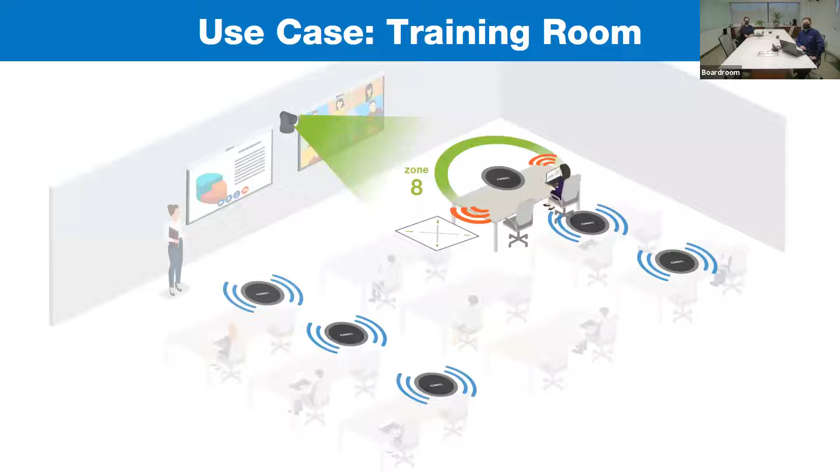Here's a COVID friendly training room, for example, and we've got a few preset zones for our instructor. So when she steps into these zones, the camera automatically hits that preset zone. Conversely, when there's a question in the audience, you have the opportunity to create zones for each of those tables as well, so the camera is hitting the table.

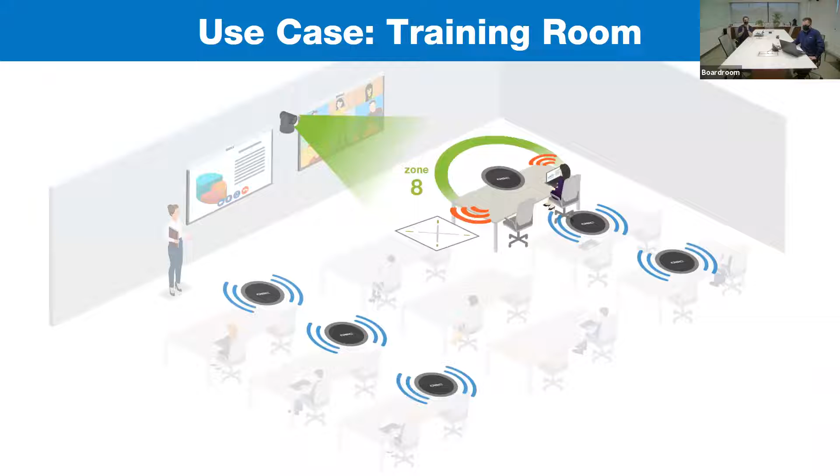Now, the camera may not be tracking in on somebody's face, and in a training room you don't want that. You basically want the camera to cover the entirety of that table. So you don't want a tight preset; you want to make sure you're covering the general area you're working towards.

Here's a closer look at what that training room might look like. Again, you've got loudspeakers overhead. In a room of this size, we would recommend two Sennheiser microphones positioned relatively in the center of the room so that it can hit the presenter as well as the audience. And then you've got the rest of the QSC ecosystem to support that effort.

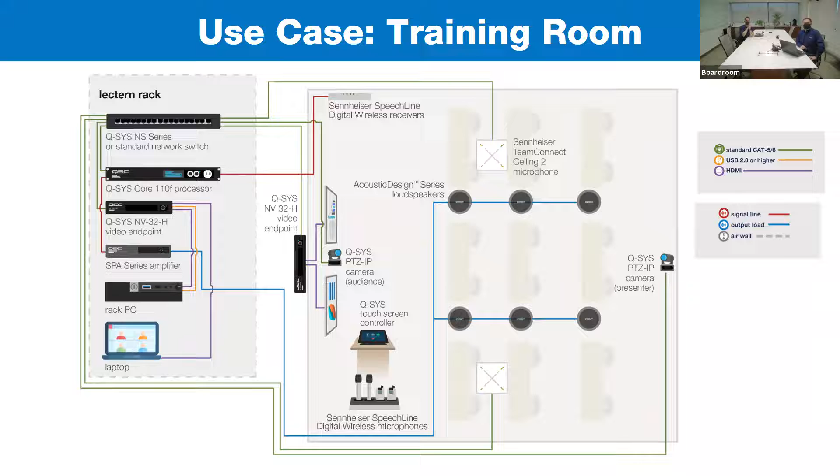We're not zooming in tight on faces. Rather, we are getting close to the zone, so that we have a comfortable margin of error, so that if I move from one side to the other, the camera is still picking up everything.

Let's see, anybody monitoring that Q&A? I see Q&A popping in there. Is there anything of interest before we transition? I promised that I would check.

Hank is asking about the camera chip size. The camera chips, like the color sensor size, right? Is that the nature of the question? It's on our website. As the Sennheiser group goes through their portion, I'm going to look that up for you guys. So no problem.

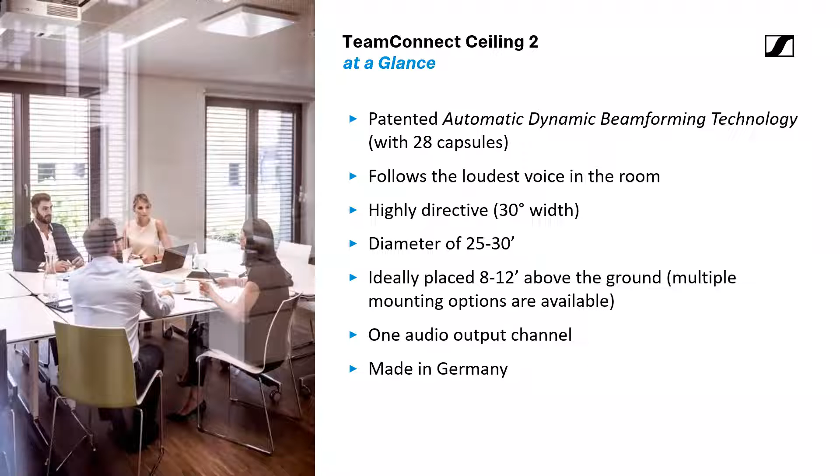Now, it is a single beam that is dynamic and beamforming. That means there's one audio output. And like a lot of our products, we make this in Germany as well.

That's it coming out of it. The secondary could be used as a switch hop if you want to go to another microphone or another Dante device in the ceiling. Or if you were doing redundant networks, you could use a primary and secondary for redundancy. It's got the analog out if you choose to use that - just a balanced 3-pin Phoenix connector right there. The other network port on the right is for control and PoE.

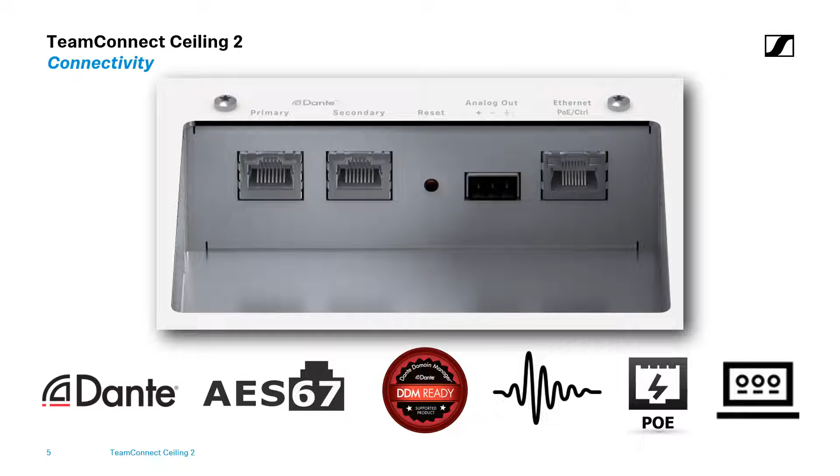Chris will kind of dig into the control platform a little bit. So if you're running a Dante network, 2 category cables to it and you're set and ready to go. If you just want to use the analog output, 1 category cable for power and control, and then a 2-conductor shielded cable for the analog output side. And it's a Broadway chip, so of course it's compatible with DDM and AES67 as well.

So just a quick little picture of what the coverage looks like. If we're looking at that 13, 14 feet radius, we've got really good coverage, and then just a slight drop off after that. This picture shows what it looks like at about a 10-foot height - that'll change a little bit if it's lower or higher. But if we stay within this 25 to 30 foot diameter rule of thumb, we're in really good shape.

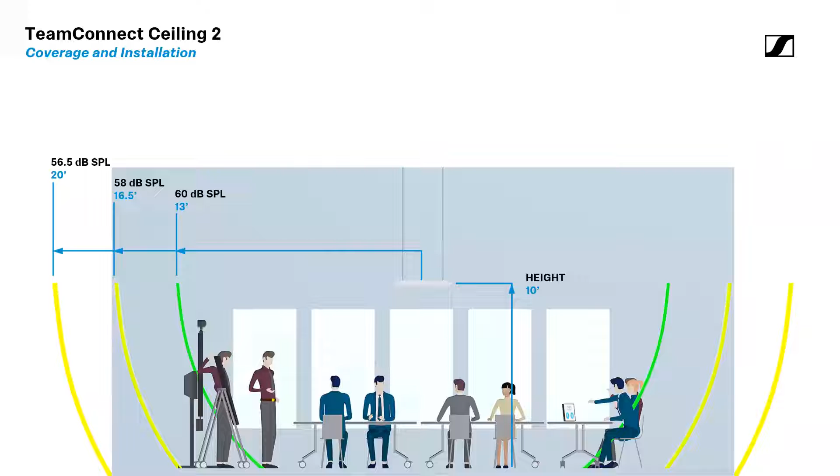So when we look at the automatic dynamic beamforming technology, we are not using multiple lobes or zones of pickup coverage. We are using that one tight angle. And it's important to know that beam doesn't follow an area in the room or a general direction of where the sound is coming from. It actually locks onto the XY coordinates of the voice itself, or whatever the sound source is.

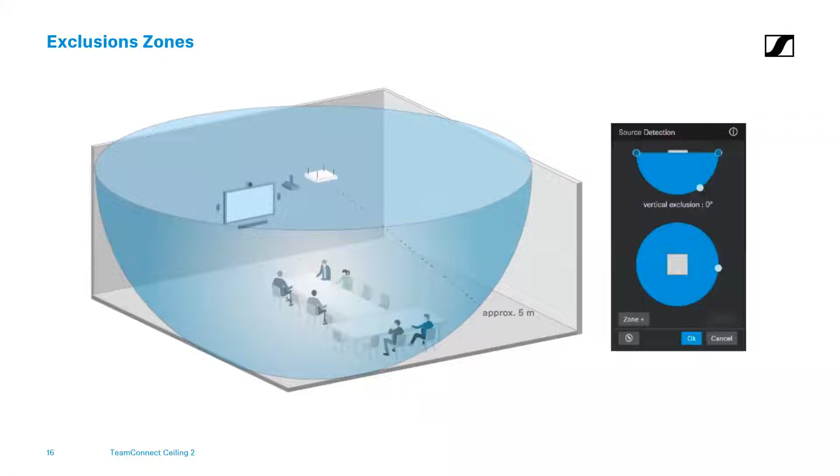If there's areas of the room where you don't want it to pick up, you create what we call an exclusion zone. So you can see we can edit on the right-hand source detection side, kind of a pie out of the front of the mic, which will allow it to ignore this projector. It just gets rid of those vector points that the microphone might steer to, as well as the sound bar in the front wall, but it's still picking everybody at the table up.

If you say in this room you wanted to maybe make it more defined towards the table, you could set a vertical exclusion zone and really trim that down so the microphone's not going to steer anywhere but the table in that scenario.

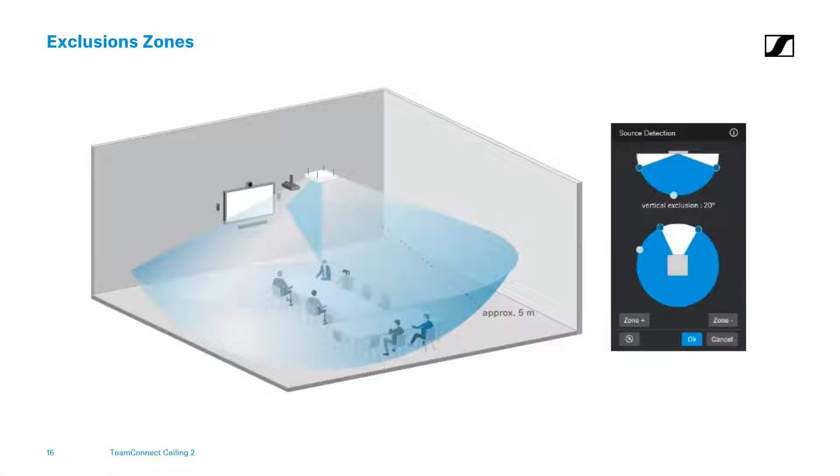The Control Cockpit uses our Sound Control Protocol, which is our API for the mic, and that PoE network port, the LAN port, is where that communication is happening. The Control Cockpit is using the same commands that QSys is using, and that's why we're able to seamlessly control it within the QSys ecosystem. So all of these commands are available there, and the plugins really use them to do a lot of powerful things.

So what I'm going to do really quick before we hand it back over to Patrick is take a look at the Control Cockpit in real time and just see how closely this microphone tracks. So if I move my head a little bit, you've got the horizontal angle and the vertical angle.

And as I move, it'll shift an average of 5 degrees. It's going to measure that shift—so it could be 4 degrees and 6 degrees, depending on where you're at in the pattern. But typically it's about 5 degrees, and it's going to register that and send that command every time I move.

And you can use that in camera tracking and preset recall—camera preset recall.

So with that, I'm going to send it back to Patrick, and we'll see how this works. And Patrick, do you mind if I just address a couple of questions that came in the chat? I was starting to type a few, but there were a couple that came in that were similar.

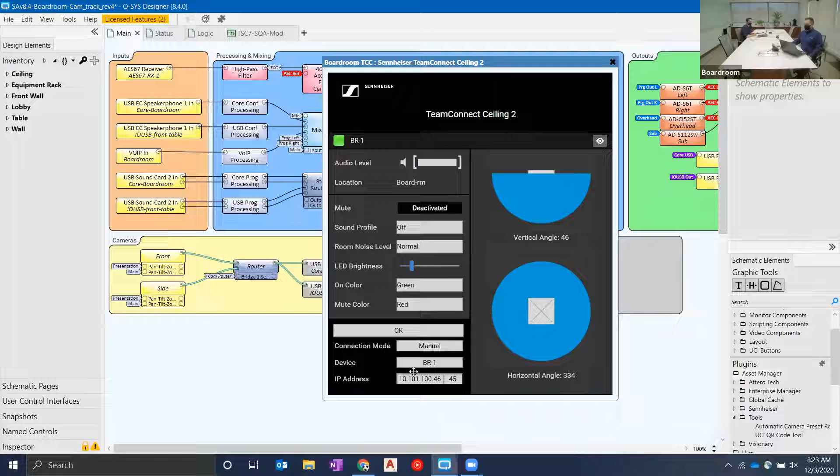So this actual plugin is going to be essential as part of the automatic camera preset recall. So you'll have to have both of them in your design. And I'll mention too, people are asking, where do I get the plugin?

Those of you that might be new to QSys, if Gary were to go up to tools and go to asset manager, eventually when these plugins are available, this is where you're going to look to find them. So the Sennheiser microphone is there now, and the automatic recall plugin will be there shortly. It's still available, technically not released.

So here we go, it'll show up once you install it. It'll show up in your tools over here. You can see down in plugins, and we just grab that and drag it right in here to our design.

All right, let's zoom in a little bit for everybody here into the section we're actually working in. So there's the actual plugin, and then we'll talk about these two pins.

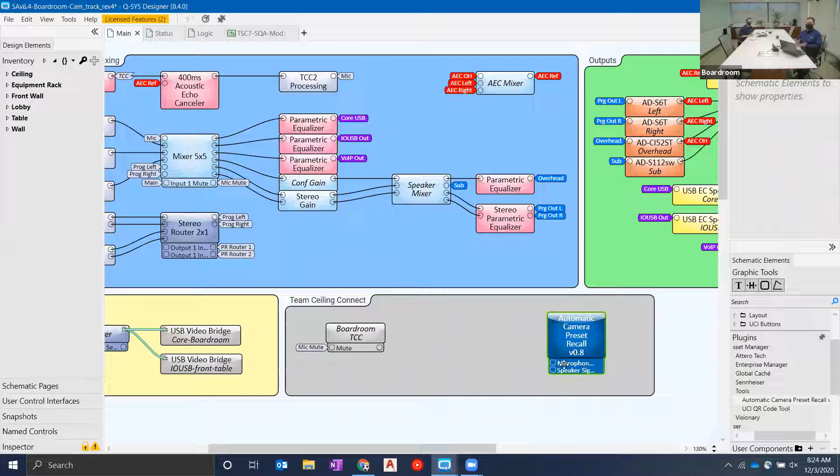It comes with the two default pins that you need to use to make the system work properly. They're already exposed. There's additional control pins that you can use for other things. But we're going to go into the plugin and actually look at it a little bit more, and let's zoom a little more so you guys can see it better here.

Starting at the top, you'll notice that there's a setup page. This setup page is going to be the global setups for that entire plugin. And then you'll have a microphone tab also, and those will be specific to each microphone that is connected to that plugin. So to set all this up, we need to be on a running design.

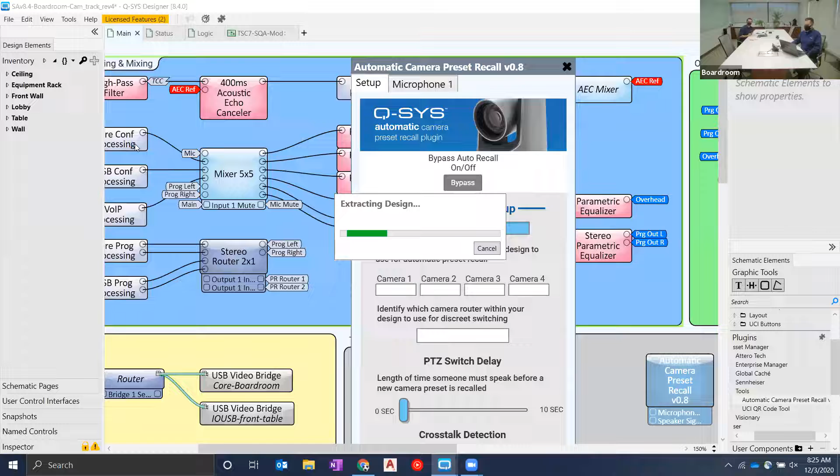So I'm going to emulate here. A lot of this can be done ahead of time. We obviously don't want to push a design to the room we're in, because you guys don't want to sit and listen to silence as the room reconfigures and everything like that. So we're just going to do it in emulation.

So we're using a combination of the control pins I showed you before, and then I also use control components. Instead of having to wire every little thing and expose all these control pins from the cameras, from the router, and from the microphone, and then wire them all around like we do our audio signals, we're using a lot of the control components so that we can just bring them in natively.

So what I did earlier, and this is important to note, on my camera section I had to name my cameras. If you don't name your cameras and stuff, you have to give them a unique name, so when you drop them in they won't show up as a named component. You need to actually name them. So we have our front camera, our side camera, and then our router, and then our two different bridge points here.

So since we've named those, this room has two cameras. We'll choose how many cameras we want, and you'll notice that we ungray the actual cameras that you can use, the amount that you can use. So if I open this up, it'll tell me front or side. Well, I want my camera 1 to be my front, and I want my camera 2 to be my side.

Right below that, it identifies which camera router is being used for discrete switching. So obviously you've named your camera router just 'router,' very generic. So as we scroll down... I'm going to jump back up to the top.

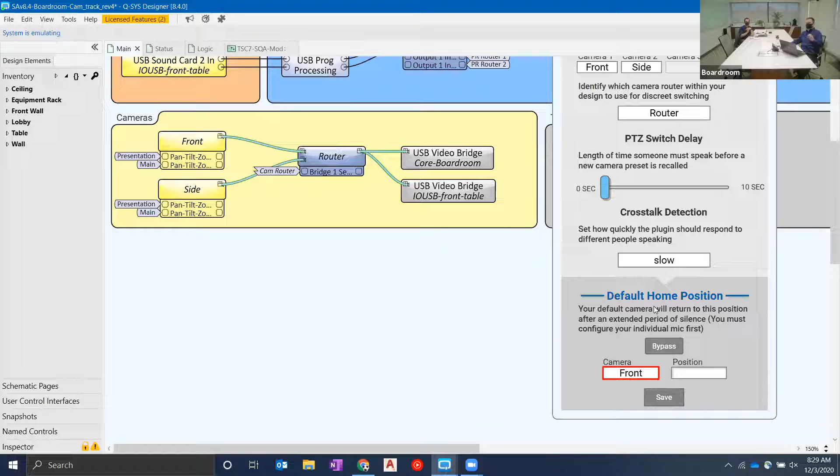And this default home position is separate from the home position you would actually set in your cameras. So when you set what you want to be the default home position for the camera tracking, you will save that, and we'll do that when we get to the live side of things.

All right, going back up, let's switch over to the microphones themselves. So in the microphone, mic 1, pretty easy on the tab - this is where the microphone's coming in. We need to choose what microphone, because it's going to be getting information from the microphone.

We named our plugin, our TCC2 plugin, as Boardroom TCC. So if I click here, I should see Boardroom TCC. Click on that, and now we've got that microphone, and we'll start tracking it, and it will give you that current angle, which is useful for setting up the zones. It also gives some other feedback and LEDs for local mic signal and far end talker signal, which are the pins we're going to wire once we get out of talking about this part.

You have up to 10 zones that you can make out of this microphone - 10 zones, just like pie slices you're going to cut out of the 360-degree pattern of the microphone. It works in a couple different ways, and we'll set it to 4 here for a second, and then you'll see that it opens up the 4, and 5, 6, and 7 are still grayed out.

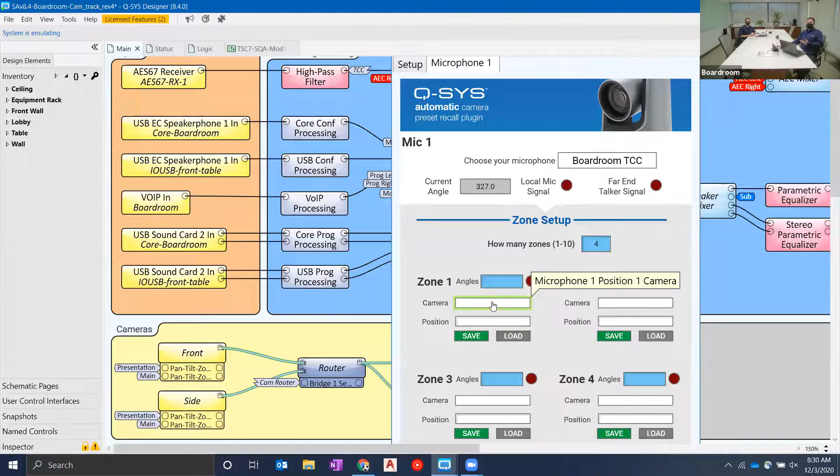So when you're setting this up, you can take your zones and see how many you need in the room. We might have one on this side of the table, one at the head of the table for your chairman of the board, one at this side, and then maybe one up front for when somebody's presenting. Then it's easy just to move around the room and figure out where you are within the microphone.

You can use Control Cockpit, stay here and look at the current angle, and then set those angles for each zone. So when you go in here, you would just set the angles - we'll type a couple numbers in here, 15 degrees to 150 degrees. We type those in there, and now that angle is what, when something is in that zone, it'll activate that zone - you'll see that LED light up. We'll get into that on the live one in a second.

And then you choose what camera you want for that zone, and it gives you the ability to save the position. Saving the position is actually moving the camera to the position and clicking save. That number gets saved there, and you'll know where the position is for recall. It's not dynamic, it doesn't move with the camera every time. That's a fixed set of coordinates, X, Y, and Z from the camera that it will recall every time you're in that zone.

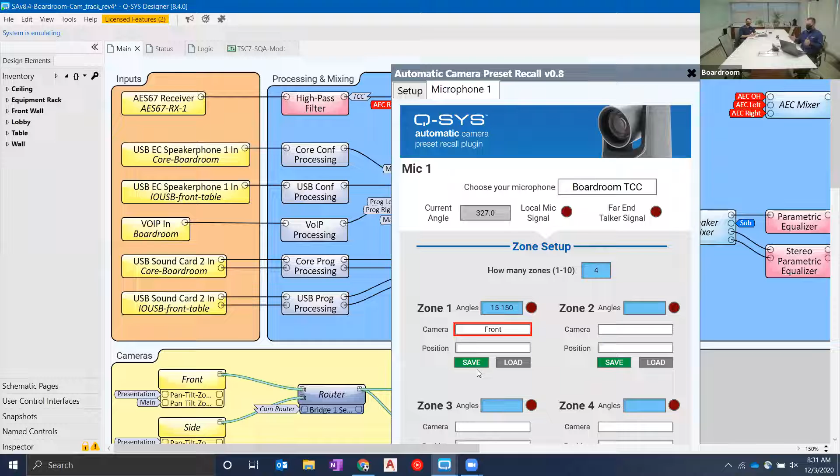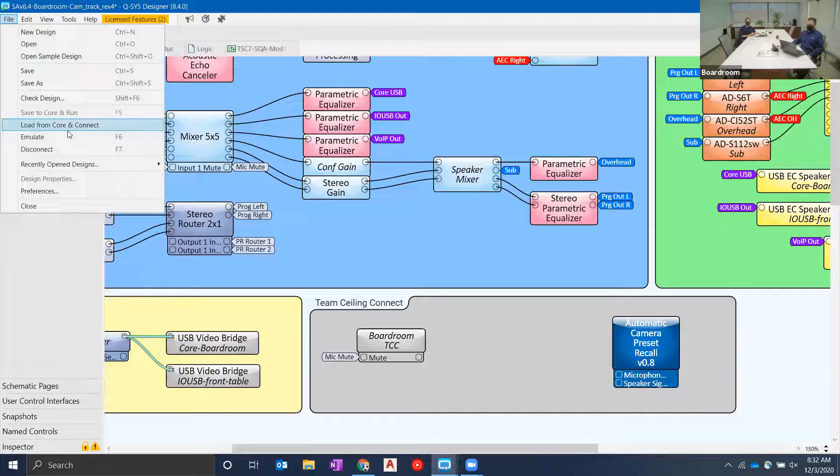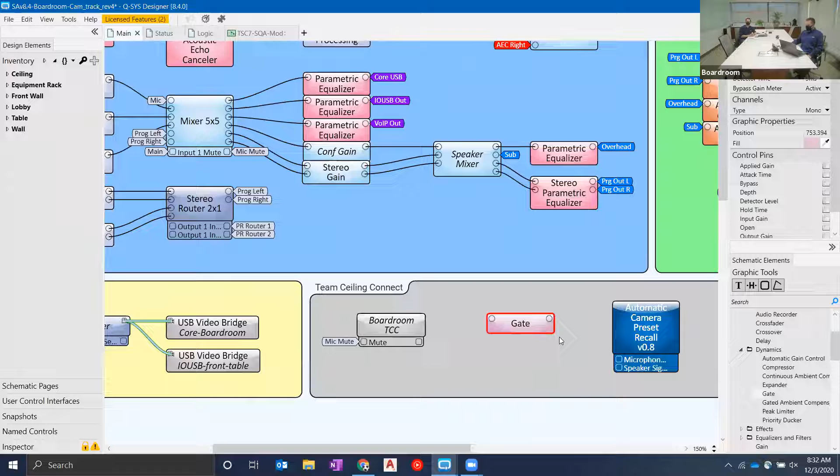So let's wire this in. The last things you have to do to make this actually work, and the easiest way to do it, to get out of emulation mode, is to use a couple of gates. So we're going into our dynamics here, we're going to pick up your standard audio gate, and we need 2 of them, so we'll drop them both in here. Why don't you explain why we're using gates to do this? Because ultimately what we're trying to feed is the control information from the microphone to the plugin.

So with the gates, these 2 pins here are not audio pins, they're not audio coming into there. It's a reference pin for if the gate is open, true or false. So I'm going to put the open pin out on each of these gates. When I wire them, this will be my microphone signal, which tells me somebody in the room is talking. And then we have our far end here, which is going to the speaker signal, which tells me somebody is speaking from the far end. So like in the TCC2, when you send the AEC reference back via Dante to the microphone, so the microphone knows what is in room and what is far end, we're doing basically the same thing here. So you kind of have 2 ways to make sure your camera doesn't hear a speaker and then turn to that zone because somebody was talking from the far end, because it knows who's in the room and who's far end with it.

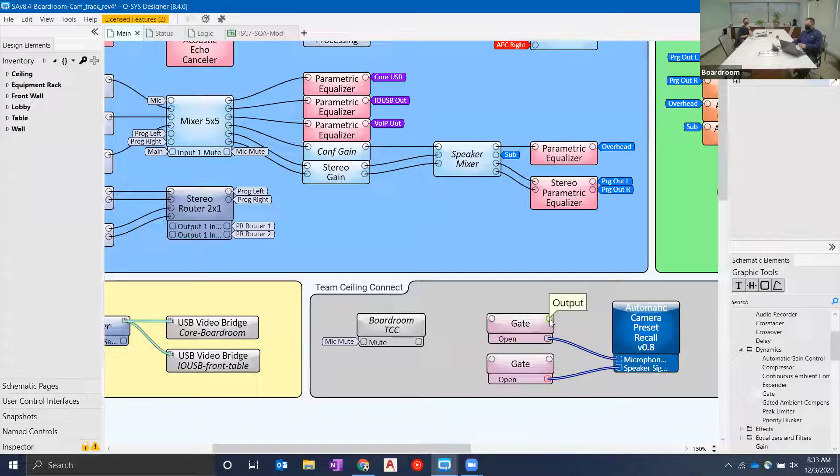So the easiest way to do this is you take the audio path from the microphone and the audio path from the speakers, and you just wire them into here. We don't care where they go after that. We don't need any output on the gate because all of our signal processing is actually being done up here still, just as we would.

So I already have a flag up here. We have the microphone coming in via AES67, that's the top block heading to the high pass filter. That high pass filter takes out some of that low end rumble before we get to our echo cancellation block, so I'm going to grab it from there. And yes, I cheated, I already had the TCC in there, so we'll grab that there. So now we have that signal.

And then we also have, right up here after this equalizer, the program left and right, because we have 2 stereo speakers in here. So we'll make this stereo, and we'll start typing in our flags here, and we'll take the program left.

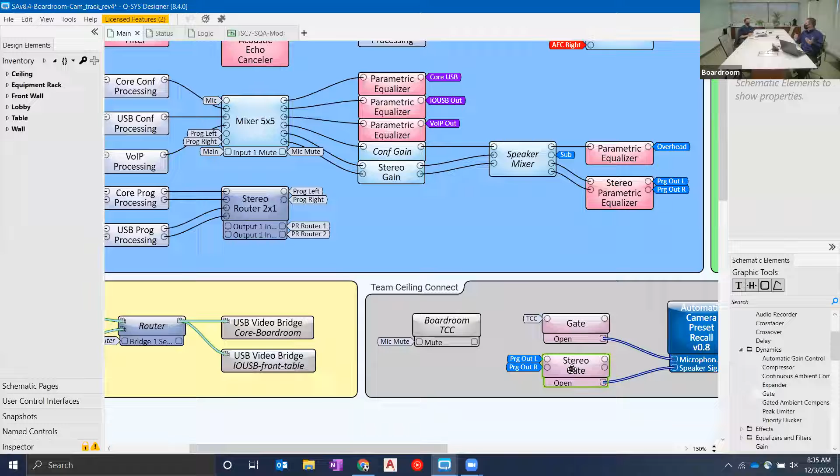Ultimately, what we're trying to do is let the plugin decide which is far end audio coming in versus audio coming from the microphone. Correct. And then based on the audio signals going into there, you would set your gates. What's great is that gate can be set separately from a gate you might actually be using for the audio path. This way you can set a separate gate for the mic to actually react to, and it's not the same gate. Basically, you're going to set the TCC gate so it's higher than any background noise in the room, but will catch when one of us talks. And then the stereo gate is far end audio, so it shouldn't have to get moved too much, but you want a little bit in there so that little clips and pops that come over somebody's speakers don't trigger it. So that's everything we need to do to get it set up.

If we go here, let's go ahead and look at a live system. Here's our live system, and hey, look, we see ourselves multiple times.

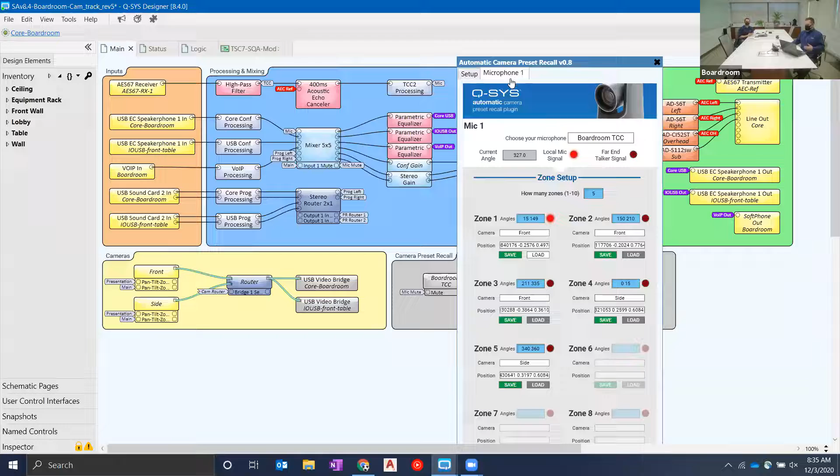So we're in the room here now, and we have our front camera position recalled. We've got those coordinates in there. We're going to show you how to do it on the microphone itself. And actually, here's a great time to zoom in once again.

Patrick, as you can see me talk, it says local mic signal, and you see that LED light up. And as Patrick talks, I'm going to start talking, and it should trigger a different zone to go.

We've bypassed it right now because we didn't want, as we were setting this up, to have everything moving. We wanted to get it nicely set up before we actually did a demo. So you did see the current angle change when Patrick was talking.

So we're getting the angles back from the TCC2 plugin. I'm going to talk again so that you can see that it went from about 300 to about 102, which is where I'm sitting.

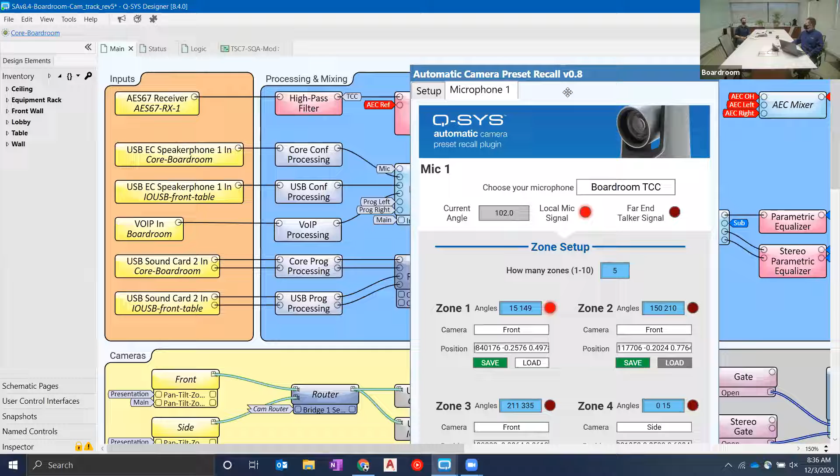So what we want to do here is set up Patrick's zone. Patrick's in zone 1, and we're going to set up his camera, which is the front camera. I'm actually going to zoom out a little bit so I can see everything here.

So if we load his preset here, yeah, there's his preset. This is where having the thing bypassed is great, because if I start talking now it would come over to me, and then it just makes it a hassle for when you're setting it up. So we're like, oh, we don't like that angle on Patrick a little bit.

We want... There's no bad angle on Patrick. They're all good. All the angles are good on Patrick. But you know what? Because it's so good, Patrick, why don't we zoom in a little bit more on you? I worked really hard on my hair today, so I'd like that to be reflected. So there we go, that's a better, we got a little bit better on that.

So I'll go over here to zone 1 and I'll hit save. And if you caught it underneath my flag there, you saw the position coordinates that were in here change. So it saved the coordinates that were from the actual camera itself into that, and now they're there.

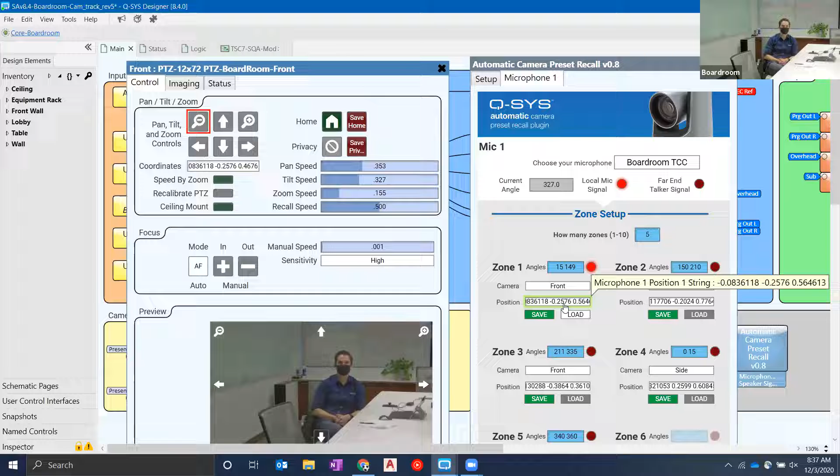Now, if I move the camera back out a little bit, you'll see that position doesn't change. That's not dynamic, that's the position you have saved in there. So every time you make a change to a position, you have to save it. And then you can manually choose to load it if you want to show things around. We'll hit home here again.

Perfect. I think that's all we have for the demo part of this right here. Well, that is the setup. Now it's the theater. Now we're gonna have a little bit of fun.

I'm gonna show one more slide because I want you guys to know what to look for when we're doing this demo, because you might be enchanted by the amazing acting that's gonna happen, but we want to make sure what you're looking for.

And let me make sure. That's my cue to walk out of the room, because amazing acting is not part of my... Let me share my screen. There we go. Share.